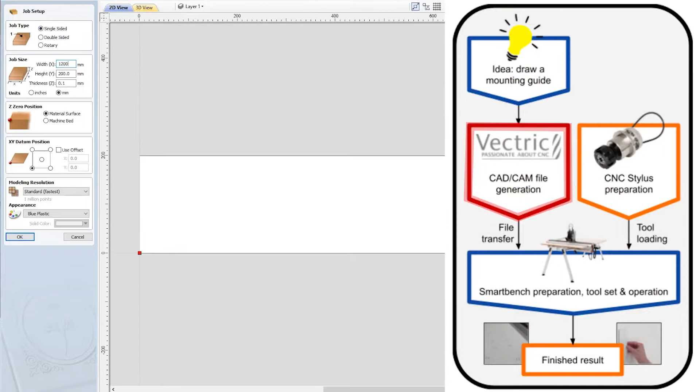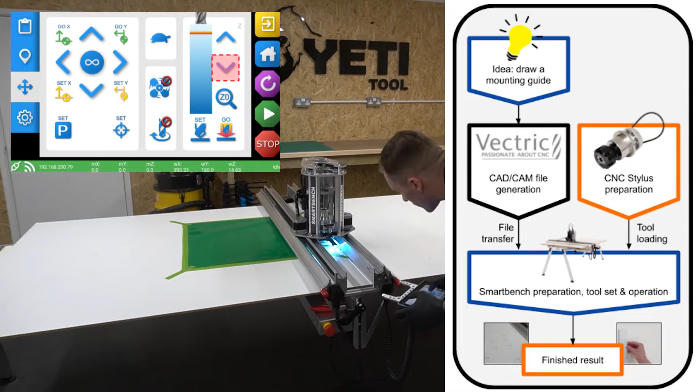We're first going to take you through creating a toolpath using Vectric and the drag knife gadget. Next, we will focus on setting up CNC Stylus with the vinyl cutting cartridge, including selecting the correct blade type for the vinyl we're using, and then setting a blade depth. We'll then go through the operation of SmartBench, which starts off with setting an XY datum, setting a Z datum,

and then starting the job right through to completion. This tutorial will be split into two sections. Part 1 will focus on file generation, and Part 2 will focus on SmartBench operation.

Before we can cut files, we need to do the design work in some CAD/CAM software. The CAD/CAM software will then export the toolpaths for SmartBench. If you want to skip ahead to Part 2, you can simply download the files we'll use from our knowledge base. Click the link in the description below to go there.

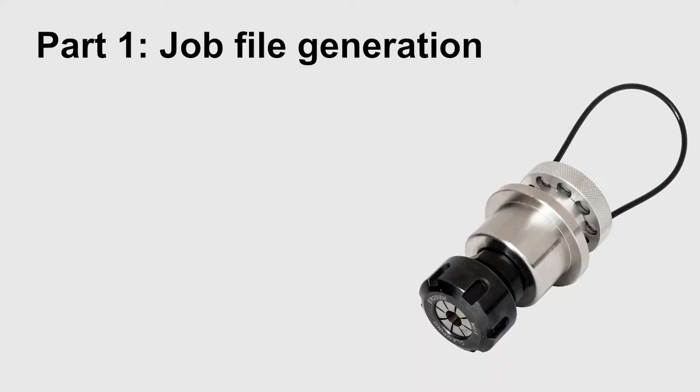So for Part 1, file generation. For this tutorial, we'll use Vectric VCarve Pro for our CAD/CAM software. Vectric works by defining a general job setup, drawing out basic features in 2D, assigning toolpaths to the drawn features, and exporting the toolpaths to a file.

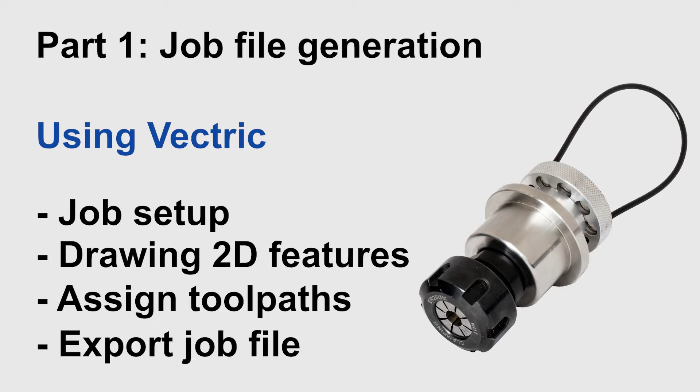Let's get into it. So we're going to start in Vectric by creating our job setup. We're going to first create a new file. So we click New File up here. Once we've created the file, we can now select our job type. For this, we're going to choose single-sided.

We're now going to enter our width in the X-axis, which is this axis across the bottom of the screen. And we're going to type in here 600 millimeters. And then we're going to set our height, which is in the Y-axis, to 560 millimeters. And our thickness in Z will be 0.1 millimeter.

We'll then choose material surface as our Z datum position. And our XY datum will be the bottom left-hand corner as shown on the screen here. We can then press OK, and this will now create our job setup.

Once we've created our job setup, we need to now import our vectors, which will be our animal stickers. We can now go up to press Import Vectors, which you'll find under File Operations, which will open our open window. We can now click Animal Stickers, and we can press Open.

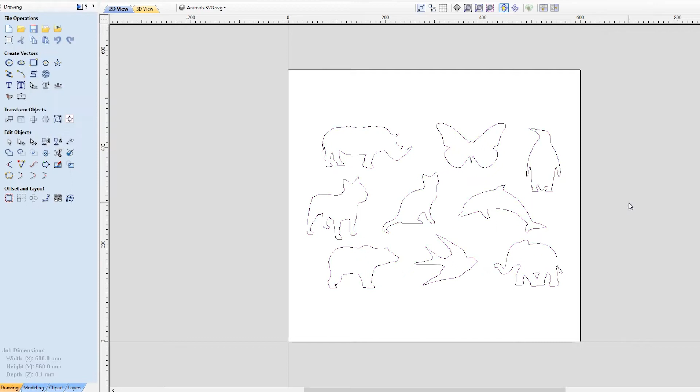This will now open our stickers, and you can see here they are individual vectors. We now need to group our stickers, so we can use the mouse to select them all, right-click Group Objects, and these will now operate as one individual object. We can now go to Edit, Align Selected Objects, and Center in Material to ensure these are centered to our job.

Before we create the drag knife toolpath, we now actually need to separate these back into their individual objects. We're now going to select the object again, right-click, select Ungroup Objects, and ungroup back to original layers. And you can now see the objects are individual. This will allow us to create our drag knife toolpath later.

When we create a drag knife toolpath using the gadget in the next step, we can use a dummy tool. This means we do not need to add a new tool to the database. Here we can select any tool. In this case, we're going to select the end mill 0.1 millimeters.

It's careful to note here that the gadget will automatically calculate the toolpath from the center of the tool, so we do not need to worry about the diameter of the tool. Your tools can be found up here in the Toolpaths tab, Tool Database, and you can see our tools here already created.

We are now going to create a toolpath using the drag knife gadget in Vectric. This comes pre-installed into Vectric, so you don't need to install anything. The drag knife toolpath is needed as we need to accommodate for blade offset, which I'm going to explain to you now.

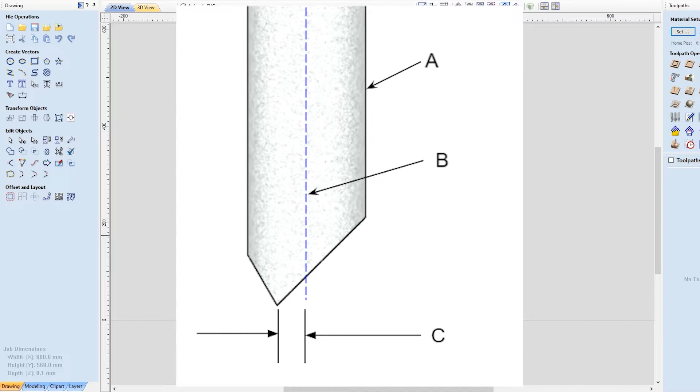Blade offset refers to the tip of the drag knife and the offset. The tip of the drag knife is offset by a small amount from the pivot center of the tool. This allows it to swivel as it cuts. This offset value specifies the distance between the central axis B and the tip C. It's careful to note here that the offset we'll be using is 0.2 millimeters.

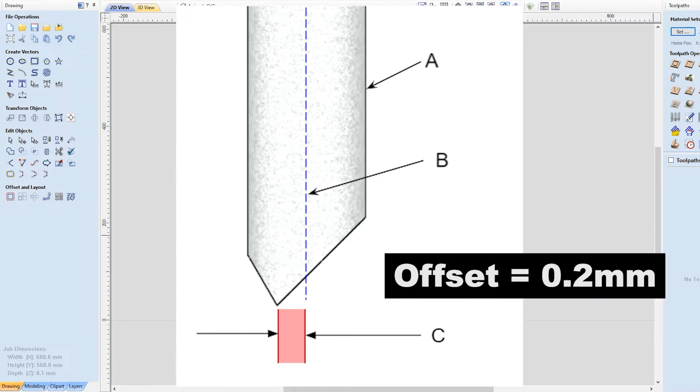So we're now going to create our toolpath. We do this by first selecting all of our objects. We can do this by clicking and then holding Shift between clicks to select each individual item. Or we can use our mouse and drag and select these as a whole.

Once we have our item selected, we can go to the gadgets at the top, click on Drag Knife Toolpath, and then we have our drag knife toolpath window.

Here we need to enter the following values. We're going to use a cut depth of 0.1 millimeters, and a swivel depth, which is the depth at which swivel actions are inserted, of 0.05 millimeters. This should be shallower than the cut depth of the appropriate tool. Passes will be set to 1, and we can untick the vector start points box. Our blade offset, as explained earlier, is going to be 0.2 millimeters, and our tolerance angle will be 10 degrees.

Here, as mentioned before, we're going to use a dummy tool. We already have here selected a 0.1 millimeter end mill, which is in our pen plotting tools we created in the earlier video.

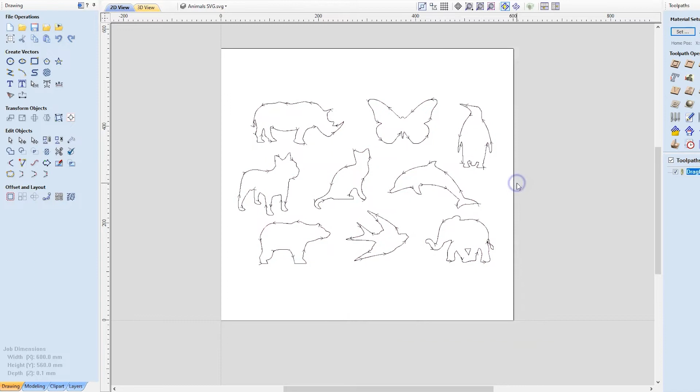We can now press OK, and this will calculate our drag knife toolpath. If I zoom in on these sections, you can see how the drag knife toolpath is different as it adds extra movements for swivels. You can see this on various different corners.

Our drag knife toolpath is shown over here. So now we have our toolpath. We're going to export this as a GCode file for SmartBench to understand. We need to first select our toolpath, which will then be highlighted in blue under the toolpaths.

And now we can press save. We're going to make sure we are saving the selected toolpath, and the toolpath name will be shown here, which will be saved. We can select our post processor as Yeti Tool SmartBench, and we can now press save toolpath.

We can save our toolpath here. In this case, I'm overwriting a previous file called animal stickers, and press save. We're going to press yes to replace the file. This has now saved our GCode file, ready to transfer to SmartBench.

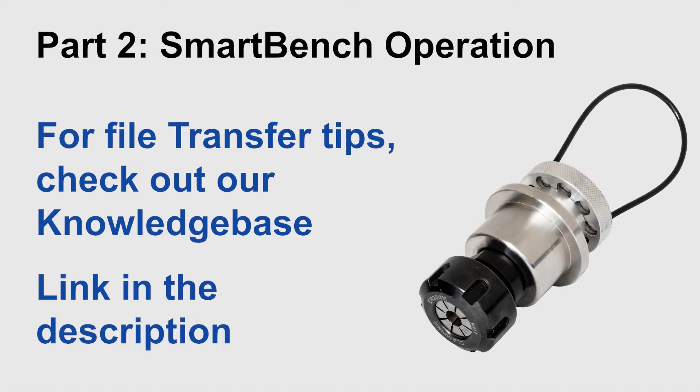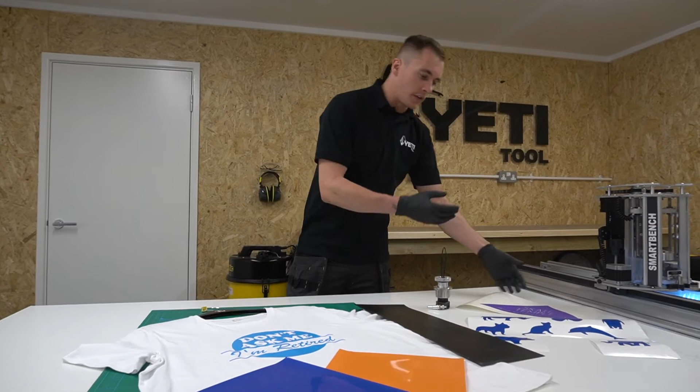Before we get into the technical data, let's look at different types of vinyl. There are 3 different main types of vinyl. There is self-adhesive vinyl, which is perfect for signage and branding. This comes in many different colours and thicknesses, which normally has a paper backing, which you can then peel away.

You can also process heat transfer vinyl, which is great for t-shirts and clothing. Heat transfer vinyl does not have an adhesive backing, instead is fused to clothing using heat such as an iron. Also sourced is much thicker, rigid vinyl, which comes in a varying range of thicknesses.

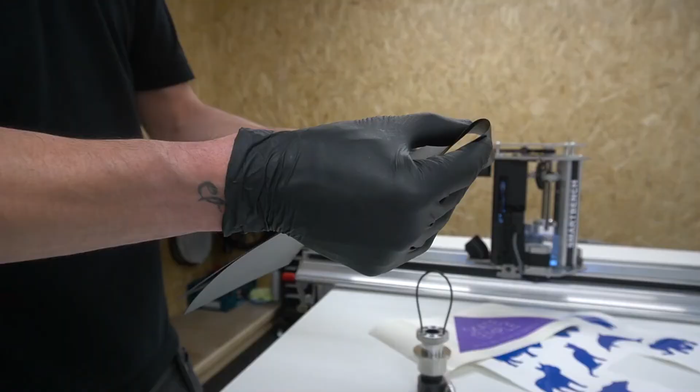CNC Stylus has been designed to process thinner materials such as self-adhesive vinyl and heat transfer vinyl. We're going to focus on these in this tutorial. You can potentially process thicker, rigid vinyls, but this needs to be taken with a different approach.

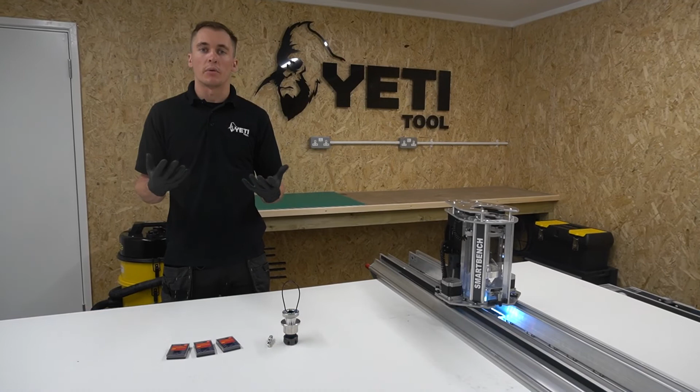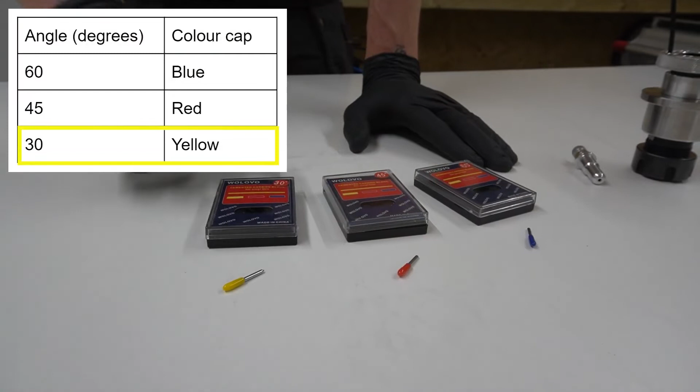What blade should I use? There are 3 different blade types, which are defined by their angle. We've included different blades in the box, which are 30 degree, 45 degree, and 60 degree blades. How do I identify which blade is which? Blades ship with a protective cap, and its colour indicates the blade angle. Watch out though, because these can easily be mixed up. Yellow indicates 30 degree blades, red indicates 45 degree blades, and blue indicates 60 degree blades.

What are the different blade types used for? The steeper the angle, the deeper the blade can reach, such as 60 degree. Therefore, this is used for cutting thicker materials. However, this can add more cutting load and can sometimes cause tearing. A shallower angle, such as 30 degree, has less cutting load. This cannot reach as deep and therefore is used for thinner materials. A good rule of thumb is to use a shallower angle as the thickness will allow.

How do I change a blade? The blade sits inside the vinyl cartridge and is held in place by a magnet which sits on a bearing.

This allows the blade to swivel and rotate. The blade can be removed by pressing the ejection pin and pulling it out from the cartridge. To reload the blade, simply push it back into the hole.

When you finish using your blade, be sure to replace the protective cap. This will stop your blade from getting damaged or blunted, and the colour will help identify the blade angle.

What spoil board should I be using? For this project, we're processing thin vinyl, so we can actually use the same technique as we used for drawing with CNC Stylus. We're going to show you a few clips of those videos now.

Although we're using paper, it's exactly the same for using vinyl. When drawing with CNC Stylus, we need to ensure we use something rigid and flat. We'd recommend using a 12mm double melamine faced MDF board. This is to ensure we have a smooth surface to draw on and a smooth surface for our lower wheels to roll along.

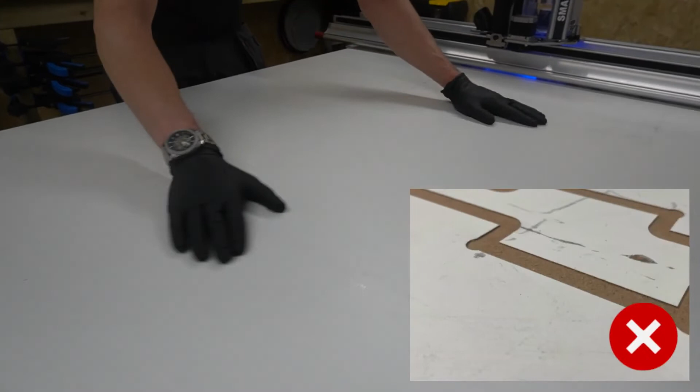Do I need a self-healing mat? If you are only drawing or cutting thin materials which have a backing paper, then you only need a flat, rigid spoil board, as discussed earlier.

If you're cutting rigid materials all the way through, or if you're locking out the movement of CNC Stylus, then you may require a self-healing mat which you can bond to your spoil board. In those examples, that would allow the blade to punch all the way through the material without blunting or damaging the tip. How do I hold material down to cut?

Just like in our drawing tutorial, we're going to use frog tape to tape along all edges of our material. We're going to start by cutting our vinyl to the size of our job as defined in our file.

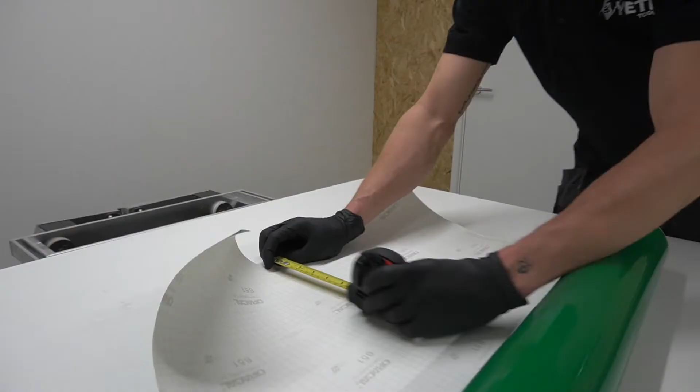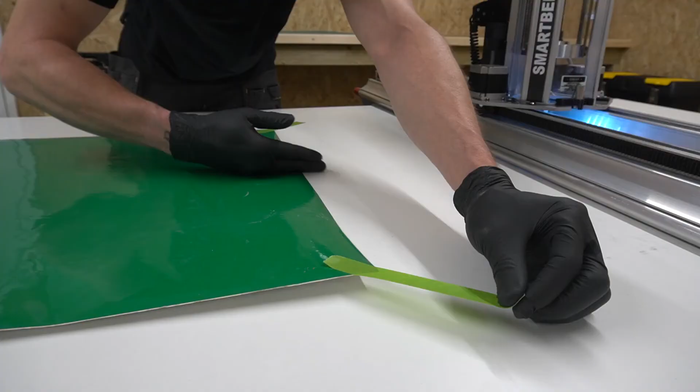Just like before, we're going to use frog tape to tape down our vinyl. We're going to tape along all the edges, and we're going to start by taping the corners, and that allows us to keep it as flat as possible. Now that's all taped down, ready for our next step.

We're now going to set the X-beam for cutting vinyl. Again, this is exactly the same as when we process paper for drawing. We're going to show you a few of those clips now. Please don't be alarmed if you see paper, it's exactly the same for cutting vinyl.

When using CNC Stylus, we need to ensure the wheels on our upper beam do not roll along the material surface, as this can cause creasing and tearing. To do this, we'd actually recommend using a gauge, something like a piece of material, to ensure our wheels are set a fixed distance above the paper.

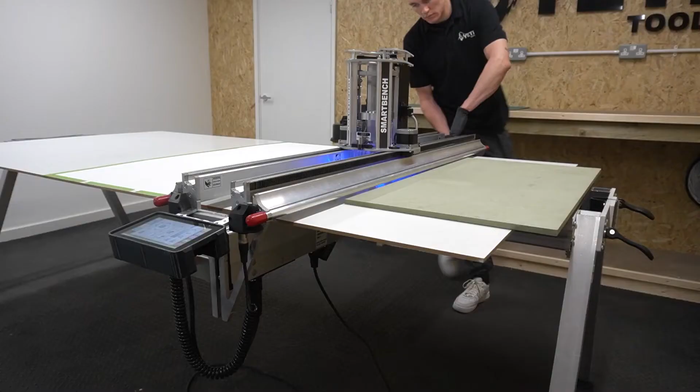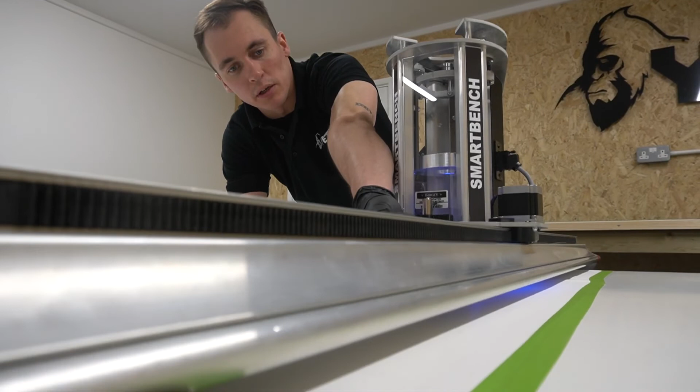So as you can see, from using our material as a gauge, we now have a fixed gap between the wheels and our paper, and this is consistent from this wheel on one side straight across to the wheel on the other side. So now we can tell our beam is nice and flat. One important thing is to ensure our clamp handles are tightly secured so that our beam cannot move up and down while we're drawing.

We're now going to talk about one of the most important factors when cutting vinyl. Setting the blade height is the most important factor because if your blade height is not correct, you'll either not cut deep enough into your material or you'll cut too far through your material through the backing paper.

We're first going to make sure we select the correct vinyl blade. For this thickness of vinyl, we're going to use the 45-degree angle blade, which has a red cap.

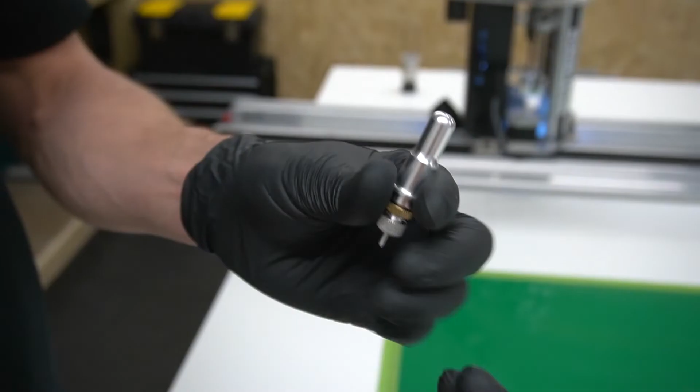To set the blade height, we're going to first insert our blade into the vinyl cutting cartridge by first removing the red cap and placing it into the cartridge.

We can now adjust the gold locking ring by loosening this off, and we can now twist the inner barrel of the cartridge to extend the blade from the barrel.

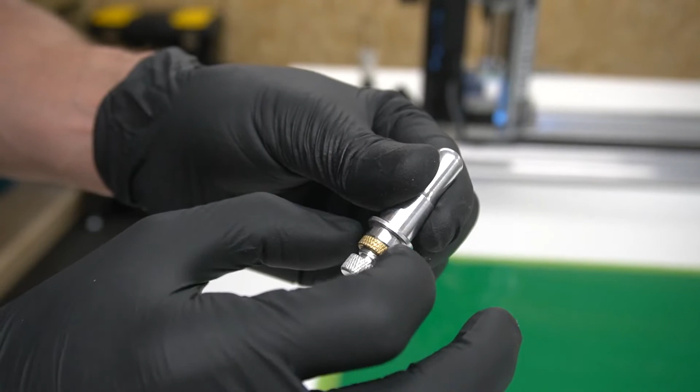The vinyl cartridge works by allowing this surface of the barrel to run along the top surface of your material. So we need to ensure the blade only extends the thickness of the material we wish to cut. As the blade is very, very small, we've included a checking jig in the box to allow you to easily see the blade.

We're going to align the cartridge with the side, and we can now visually see the blade extending from the barrel. This is going to make it easier for us to adjust.

Now that we can visually see the blade is extending from the cartridge, we're going to make some micro adjustments to ensure the blade is set to the correct depth. We don't want to be cutting through the backing paper, but we do want to cut all the way through the vinyl. To do this, we're going to cut a small sample.

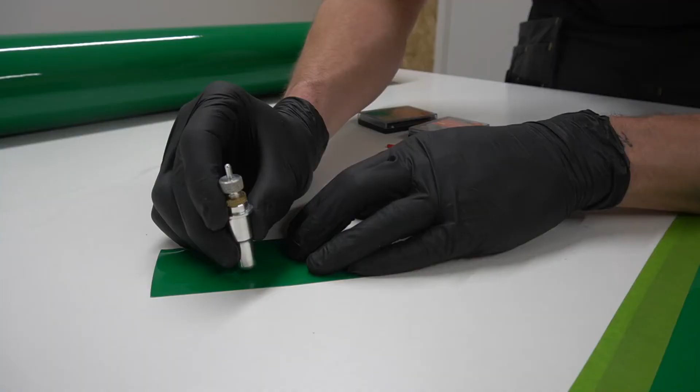Laying your vinyl flat on your bench and applying some light pressure, drag your vinyl blade across the surface. You can do this multiple times. We can now check to see if the vinyl cutter has punctured the back paper.

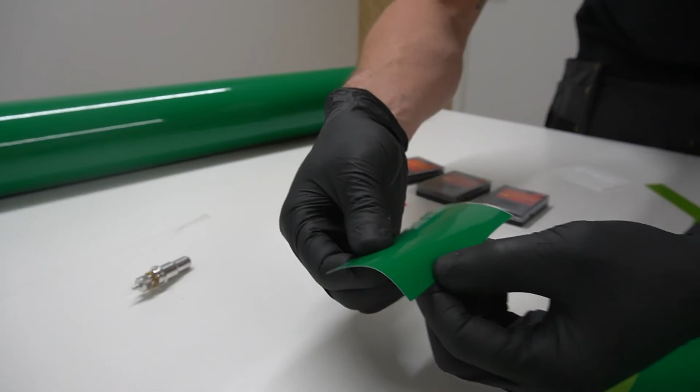We can see here this is cut through the vinyl, but we can check to see that the paper is in fact still intact. Here we have a few examples to show what happens if the blade does not stick out enough from the cartridge, if it sticks out too far from the cartridge and punctures through the backing paper, and here is one that is absolutely perfect. We've cut through the vinyl layer, but we've not cut through the backing paper.

This one shows we've not cut through the vinyl layer on the top at all, so the blade was not extending far enough from the cartridge. The next one is an example of where the blade was sticking out too much from the cartridge. This is cut through both of our layers, so you can see it's cut through the vinyl in the green and the white backing paper.

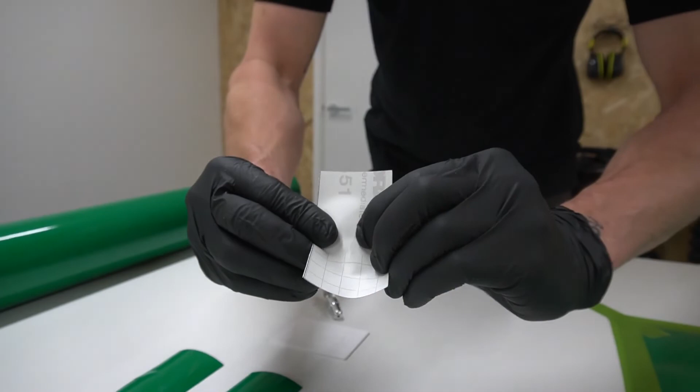The final example is where we've set the blade height to be exactly perfect. We've cut through our top vinyl layer, which you can see me peeling away here, but we have not punctured through the paper backing. To give you an idea of how far the blade extends to achieve that, we can now align our cartridge with our jig and see that the blade only extends 0.3 of a millimetre, roughly, which is the same thickness as our vinyl. This is not much at all.

The last thing to do is check your locking ring is tight so that the blade height does not change during your job. How do I load a vinyl cutting cartridge into CNC Stylus?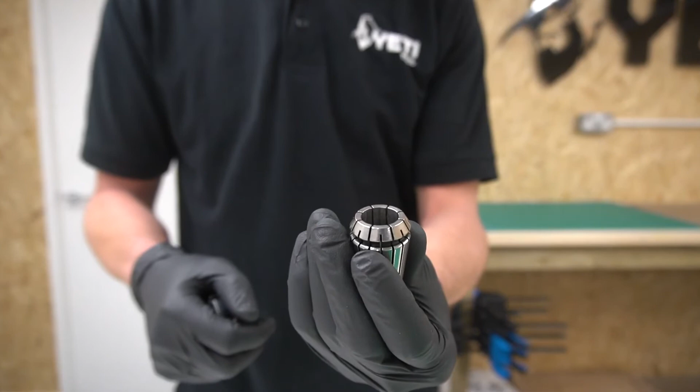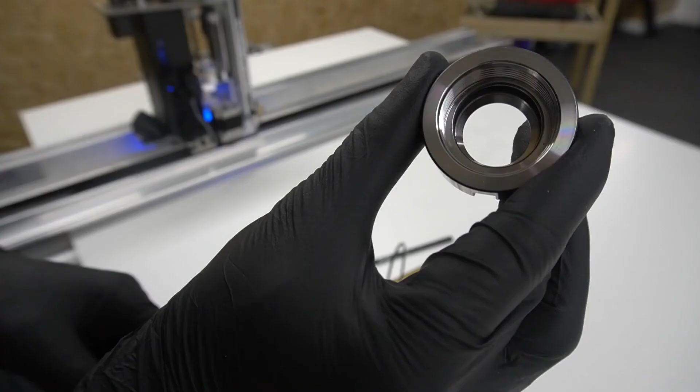The nut, which features an eccentric washer, requires the collet to be fitted from a specific side. Here you can see the thinner part of the washer at the top and the thicker part of the washer at the bottom. Holding your nut with the thicker part at the bottom and the thinner part at the top, insert your collet and push up until it clicks into place, and then push down to release. If you've fitted the collet correctly, you should be able to invert the nut and the collet will hold in place. Next, we can pre-fit our nut and collet to the stylus.

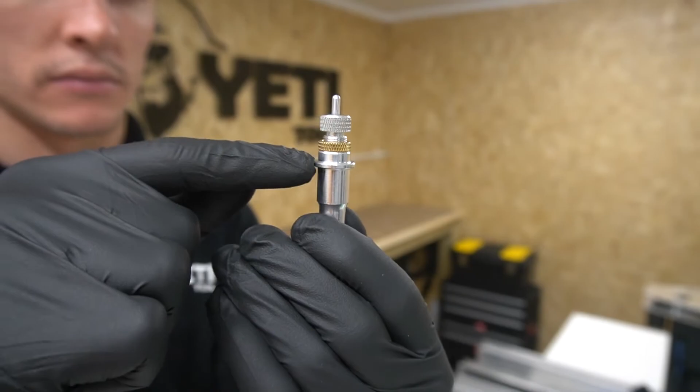Now that we have the collet fitted to the stylus, we need to load the vinyl cutting cartridge. When we're loading the cartridge, we need to focus on clamping onto this shoulder here. We can insert the vinyl cutting cartridge into the collet, and while holding it with one hand, we can tighten the nut until it grips.

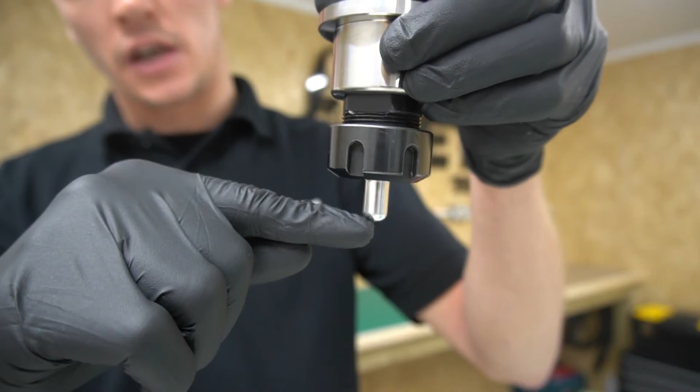We can now micro adjust so that the cartridge is straight and tighten. The vinyl cartridge is mounted in the stylus. You should have an extension of around 15 millimeters from the face of the nut to the tip of the vinyl cutting cartridge. One final thing to note is to ensure that your vinyl cutting cartridge is parallel with the axis.

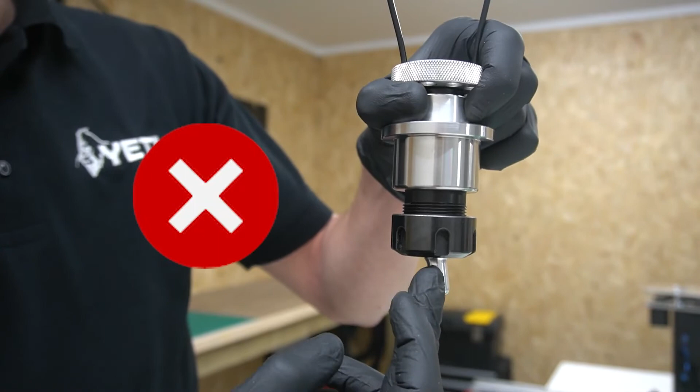Here is a very bad example of how the vinyl cutting cartridge is not parallel with the axis. Here is a good example of a parallel setting.

It's now time to load CNC Stylus with the vinyl cutting cartridge into SmartBench. This is exactly the same as we did for the pen plotting video. Here's a few clips of us doing that.

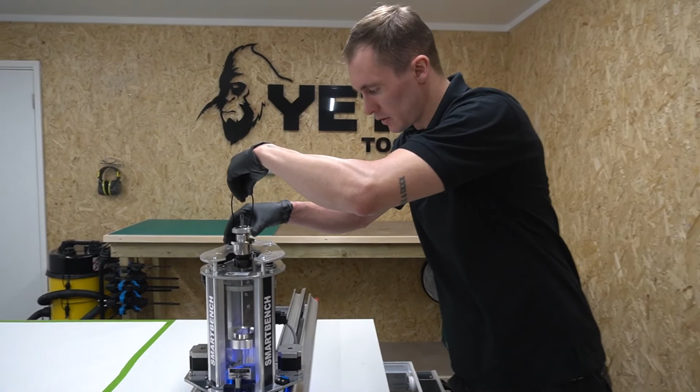We're now going to load CNC Stylus into SmartBench. Using the loop, we're going to lower the stylus into the Z head and ensure the boss sits securely and flat into the collar.

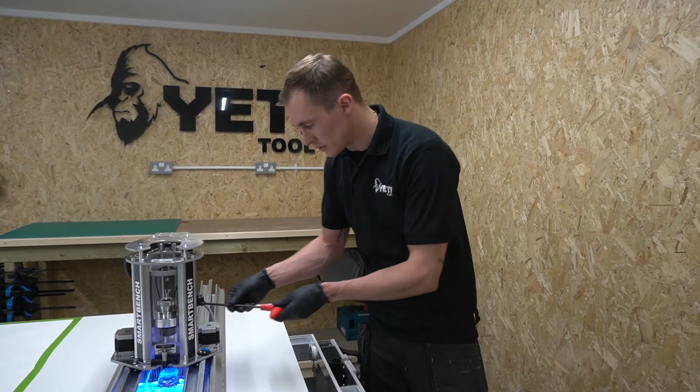We're now going to use our 6mm driver to tighten our hex bolt. By inserting the tool, the rule here is to tighten the bolt until you feel resistance and then continue to turn for a quarter of a turn. This does not need any more than 5 Nm of torque.

So now we've selected the vinyl, the correct blade to use, and we've loaded the vinyl cutting cartridge and stylus into SmartBench. We're going to set our XY datum.

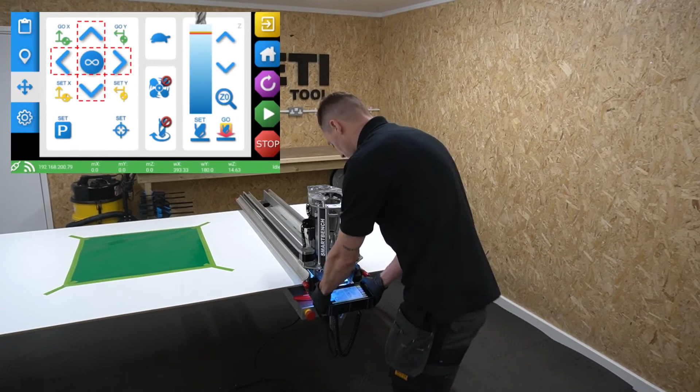This needs to coincide with our Vectric file which we created earlier. So I'm going to move the axis in the Y and in the X, and we're going to center the tool over the corner of our vinyl.

Going to move the stylus down a little bit so I can get a closer look. This looks like a good starting point, so we're going to set our datum and press yes, and you'll see a green light to say this has been accepted.

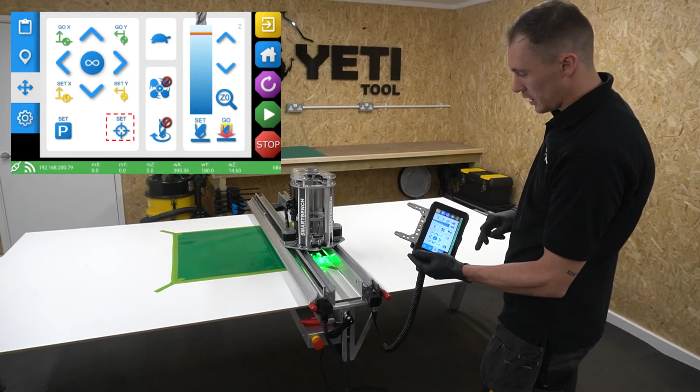Now it's time to set our Z datum. We can't use the probe plate in this case, so we need to do this manually. We're going to move the stylus down until the point of our vinyl cutter touches the material. We're then going to move this down a further 2 millimeters. This is going to put the CNC Stylus in the middle of its range of movement, which means we can accommodate for flatness across our sheet and our material.

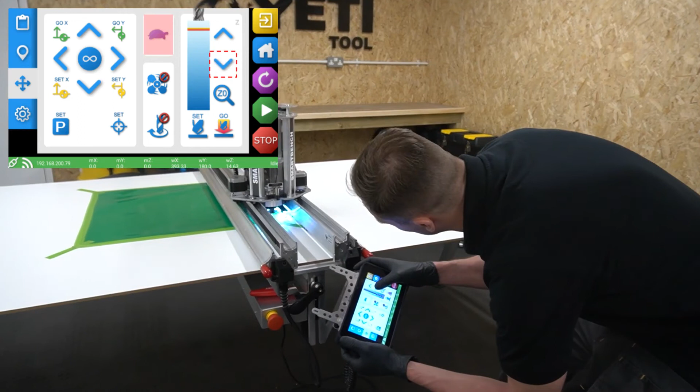We're going to first move our Z axis down so that our stylus is closer to the material. I'm now going to switch to the tortoise mode so that it moves the axis a little bit slower, and just as we get to the top of the material, I'm then going to stop.

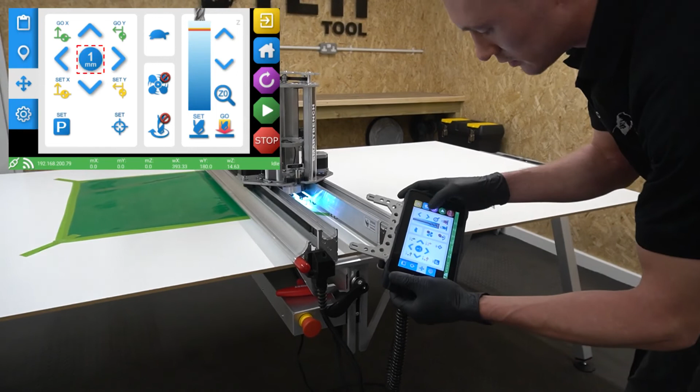We can now switch to move in 1 millimeter increments, and we're going to move this down 2 millimeters. 1, 2, and we can now press set, and you can see the green light which will then accept our Z datum.

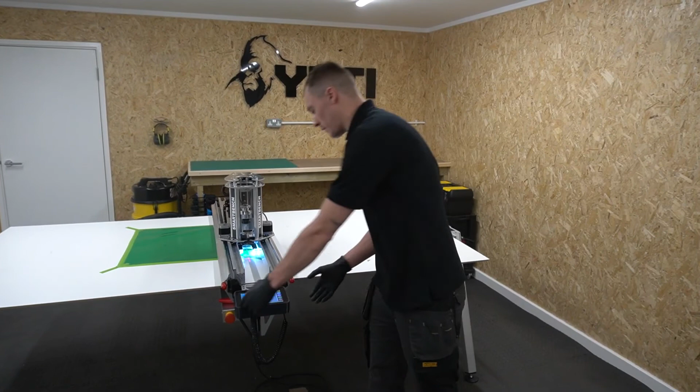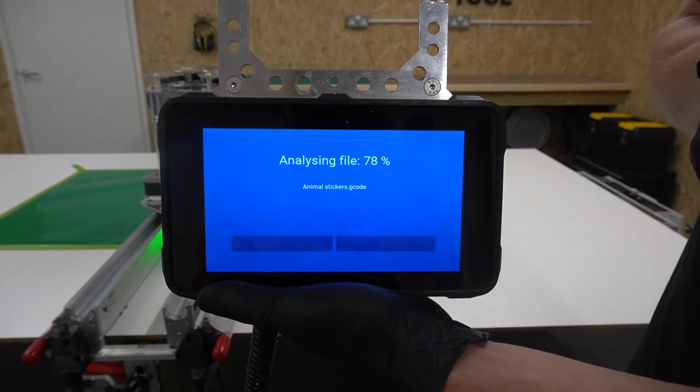Now we're ready to start our job. We've already sent the file to the console, so we're going to select our file and get it loaded. We're now going to open the file chooser, select our job, and after the file's been analysed, we're going to check our job for errors.

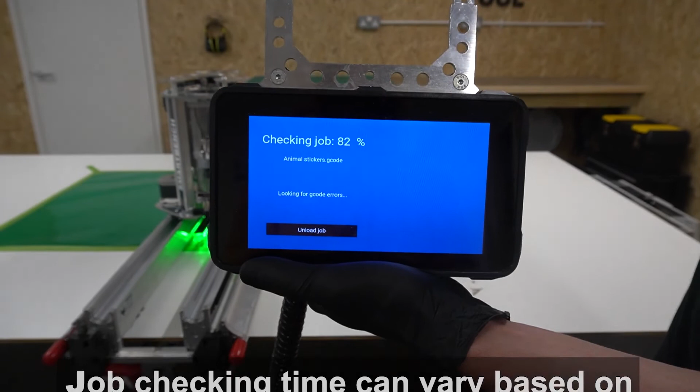Our file has now been checked and is good to go. We can now press start.

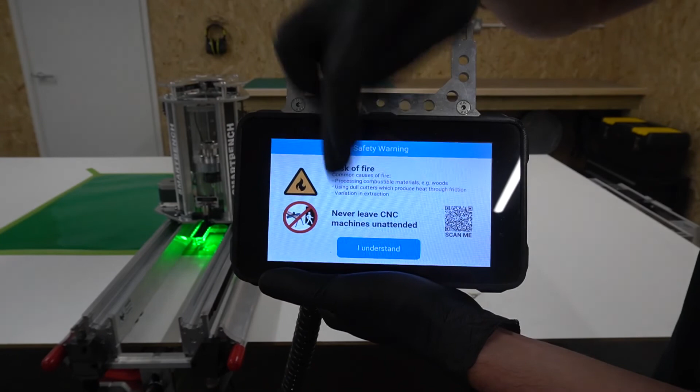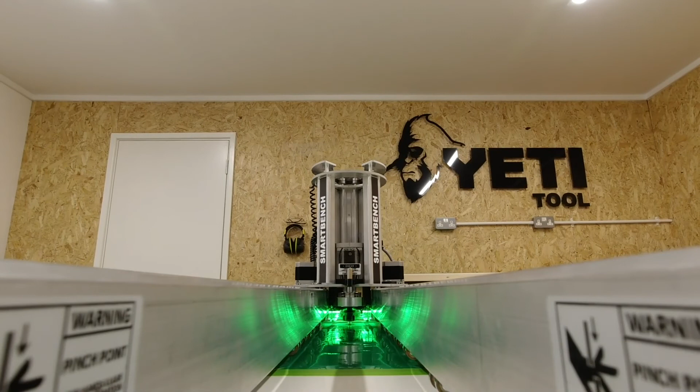Now that our job's finished, we can see the job completed screen, and this job took 4 minutes, 10 seconds. Now we're going to show you how you remove the vinyl cuttings from the paper.

Here you can see our finished sticker. Not a huge fan of penguins, but I'm sure this will look great on my toolbox.

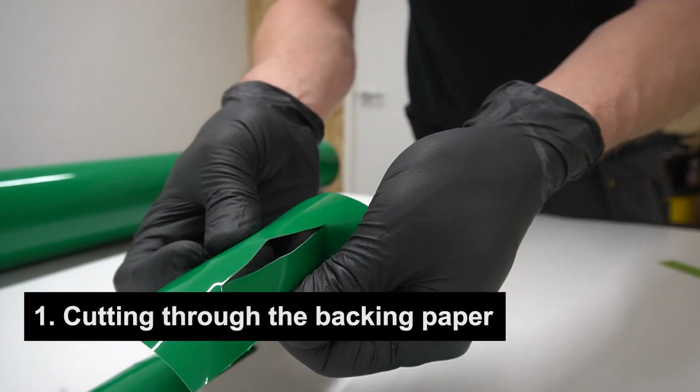We're going to show you some of the top 5 mistakes that we see when using the vinyl cutter and CNC stylus. The first one is cutting through the backing paper. You need to ensure you set the correct blade depth so you don't cut through the backing paper and the vinyl. We just want to be cutting through the vinyl layer to give us a clean sticker.

If you start seeing this, it's worth revisiting our section on setting the correct blade height, where we use vinyl to check the blade depth. It's really worth getting this right to save your job.

Number 2 of our top 5 mistakes is ensuring your vinyl cutting cartridge is parallel with the axis. This is going to ensure you get a nice clean cut and there's no tears or breaks in the vinyl. If you start to see tearing at the side of your sticker, that will likely be the cause, so I'd go and double check.

The third biggest mistake we see is using a damaged or blunt blade. We'd recommend using a jeweler's loupe. We have an example here of 9 times magnification. It's not easy to see with the naked eye, so always double check your blades. A blunt blade can cause tearing and snagging at the edge of your sticker.

In at number 4 is selecting the incorrect blade angle. Be sure to replace your blade caps so you know which one is which. Remember, the larger the angle, the thicker material, and the shallower that angle, the thinner the material. Finally, at number 5 is ensuring your vinyl is flat with no bumps.